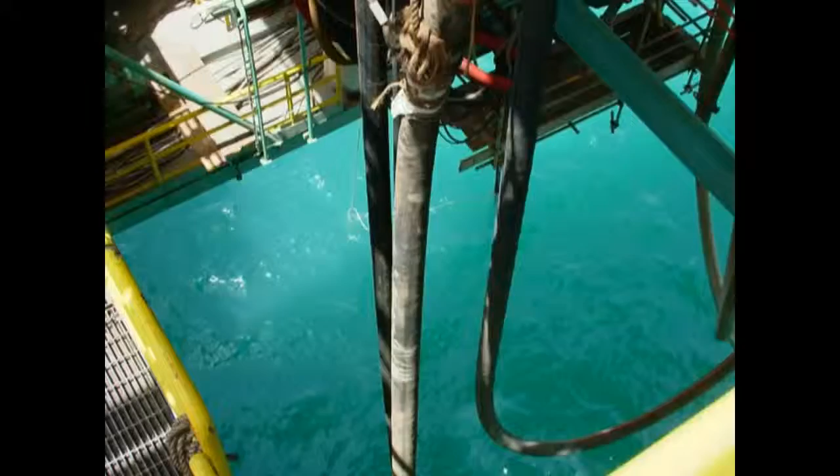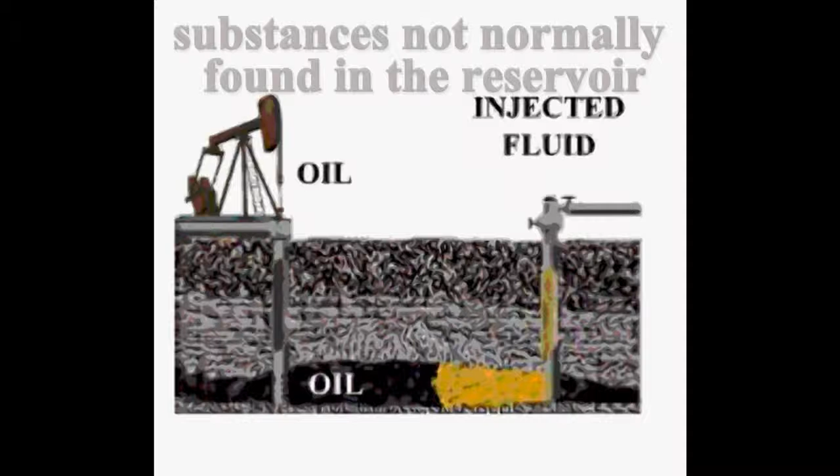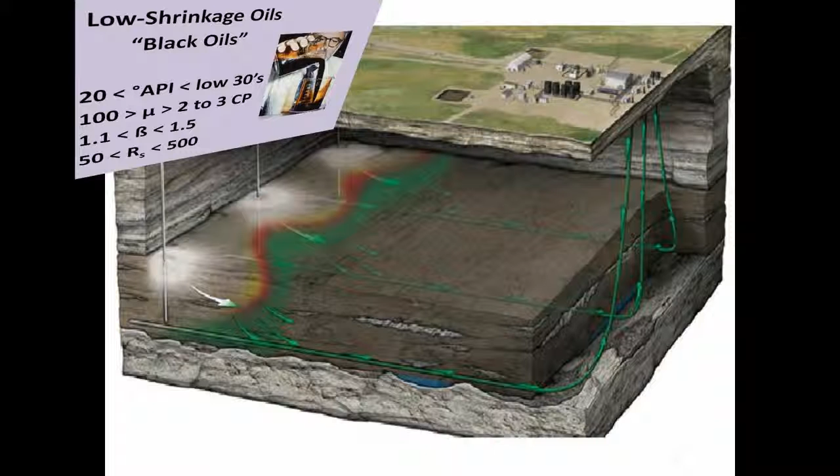Now let's discuss recovery methods using substances not normally found in the reservoir. There are several. The first is thermal recovery. It is preferred for heavier oils, especially oil with about 20 degrees API gravity or less. These heavier oils also usually require a secondary recovery mechanism earlier in the production cycle than lighter oils.

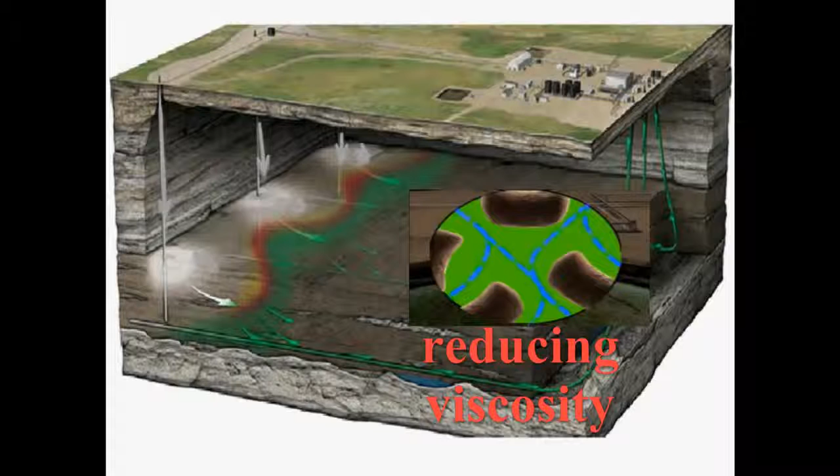In thermal recovery, heat is injected into the formation, reducing the viscosity of the oil, allowing it to flow more readily into the producing well. As in water flooding, injector wells must be drilled, increasing costs. Instead of water, though, heat is injected into the well. In certain conditions, however, that heat can be created in the reservoir itself. There are three techniques used in thermal recovery. Some more successful than others, but each offers specific benefits.

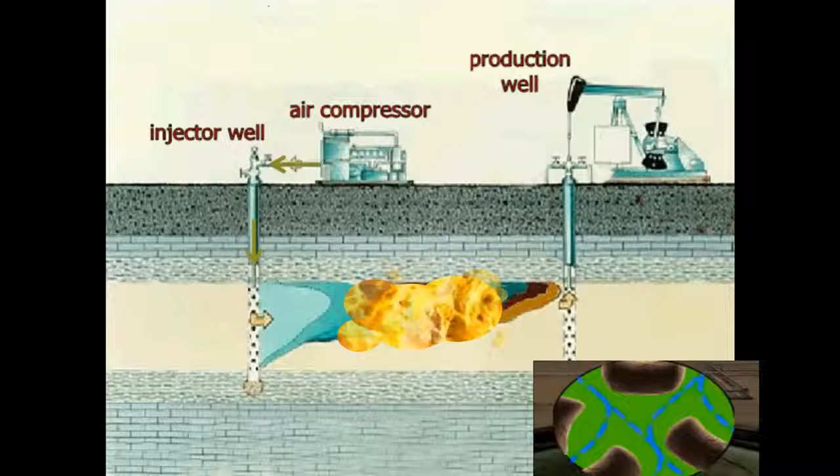In the first technique, called fire flooding, a compressor at the surface injects air down into the injector well, providing oxygen to ignite the oil in the formation. The fire is controlled by how much oxygen is injected. The heavy crude oil is heated by the combustion of these hot gases, thus reducing its viscosity. This method is only partially successful because the colder, heavy oil located away from the burning heat source persistently resists flow and can even block the flow of the heated oil into the well.

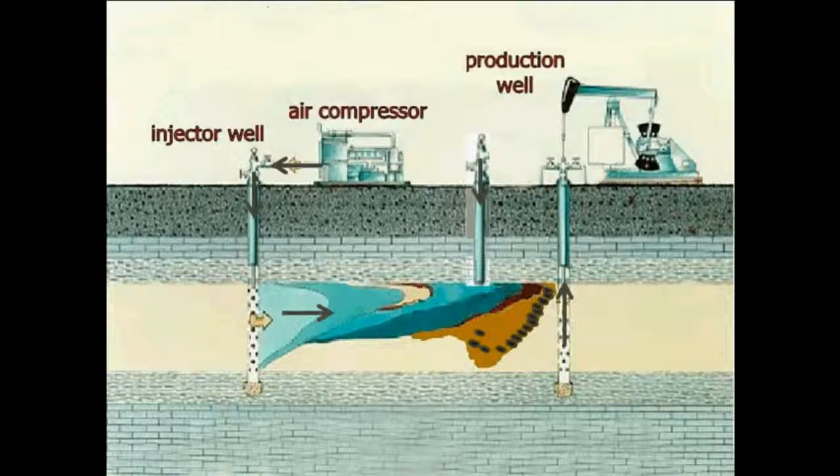Additional injector wells can be drilled closer together to reach these cold spots, but this can prove to be a poor economic solution because this method consumes the oil itself and reduces it to useless char. Fire flooding is considered a final recovery method. A more efficient mechanism in thermal recovery is called steam flooding. In this technique, steam is generated at the surface and injected down into the formation.

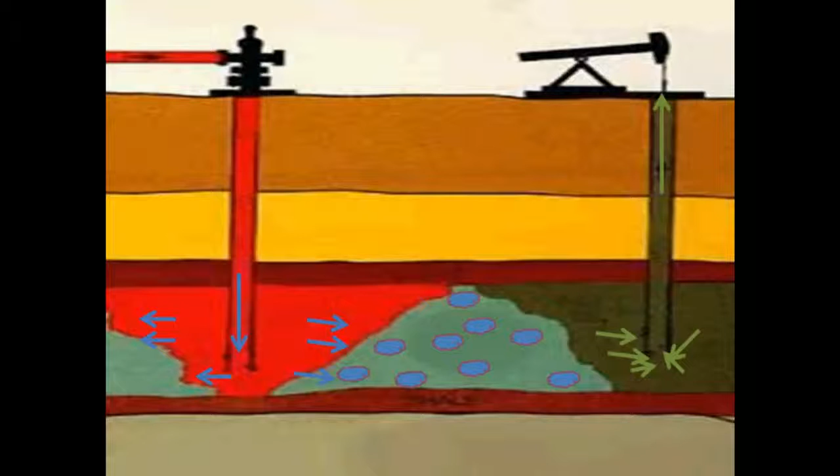As the heavy oil is heated, the steam cools and condenses into hot water that is then allowed to soak into the oil near the injection well. This heat reduces the viscosity of the soaked oil, which can now be pushed toward the producing well. The cooler, heavy oil, away from the heat source, however, is not affected and may impede the flow of oil. Steam flooding can be very successful in shallow reservoirs where numerous injection wells can be drilled economically.

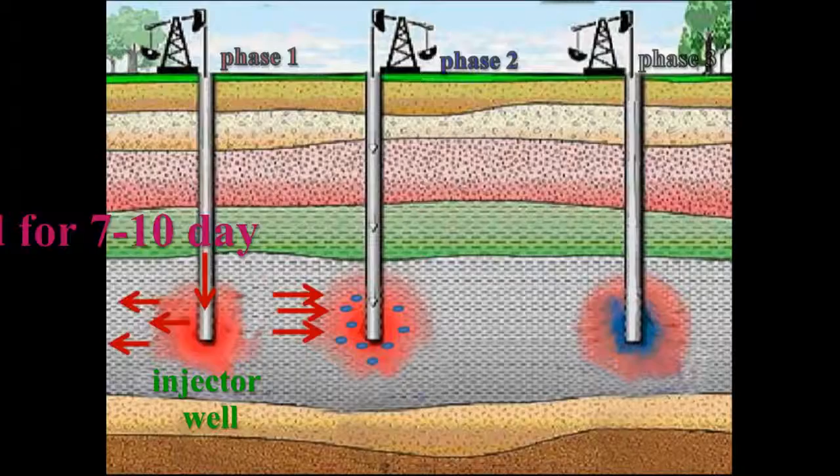The most efficient and therefore the most successful form of thermal recovery is called cyclic steam flooding, or huff and puff. Here, a well will operate as both an injector well and a producing well at different times in a cycle, thus the name. In an injector well, steam is injected into the formation over a period of 7 to 10 days. Steam injection is then stopped for a few days, allowing the steam to cool to hot water and soak the oil around the injection site.

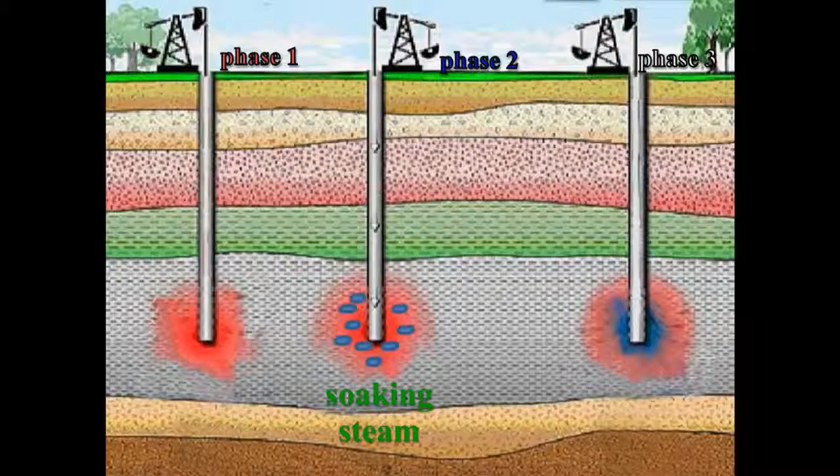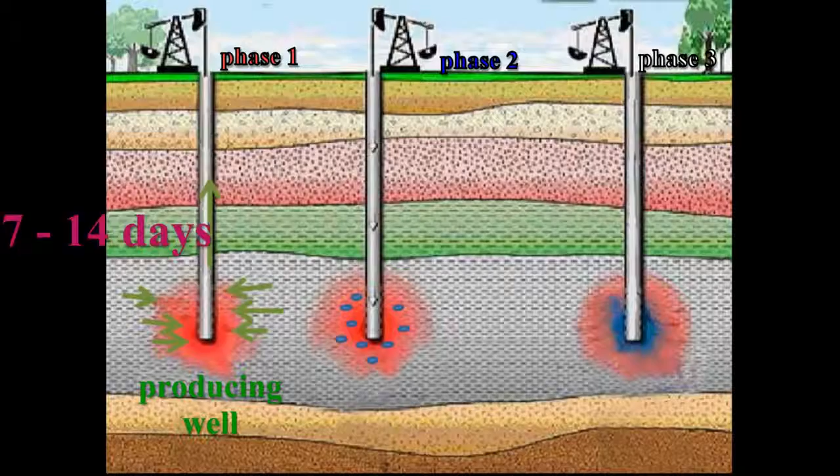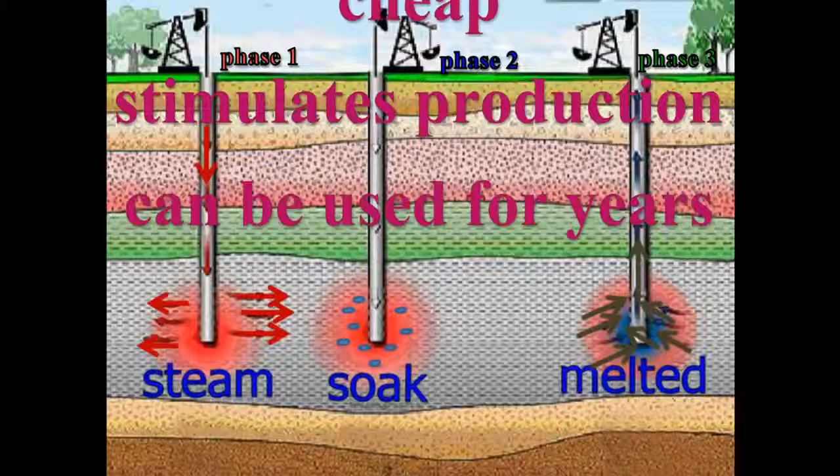When deemed ready, the injector well now becomes a producing well for 7 to 14 days, pumping out the less viscous heated oil. After pumping out this heated oil, the producing well becomes an injector well and the cycle begins again. The advantages of using cyclic steam flooding are many. It is considered to be a relatively cheap technique because it does not require drilling a large number of tightly spaced wells, and it sharply stimulates production. Because cyclic steam flooding can be used to produce a well for years, it is an excellent secondary recovery mechanism for heavy oil.

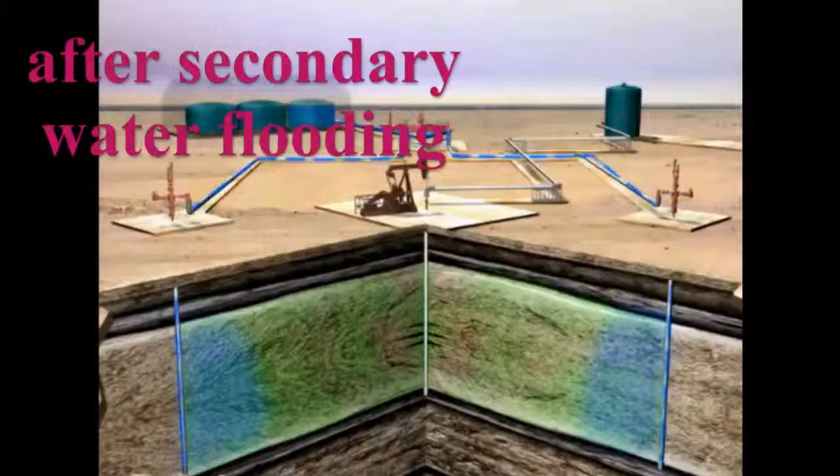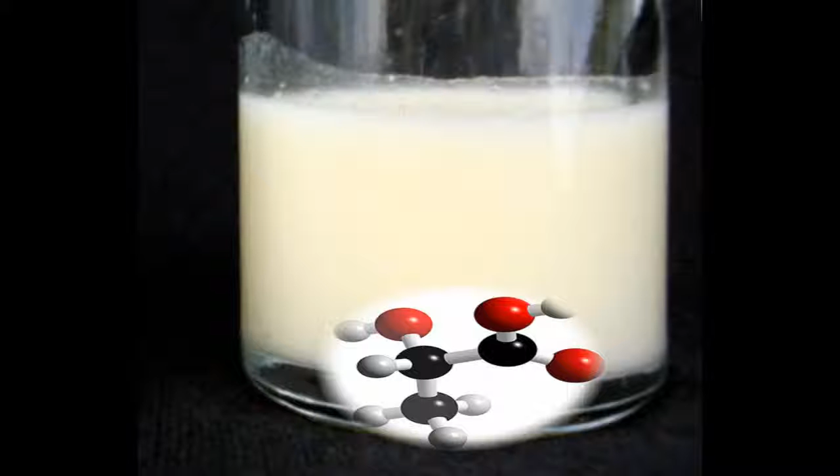Miscible flooding is another secondary recovery mechanism. Usually applied after primary depletion and secondary water flooding have already been used, miscible flooding is more commonly used as a tertiary recovery mechanism. If you remember from your chemistry, a miscible fluid mixes with another liquid to form a single homogeneous substance, like water mixes with milk. This mixture does not change the molecular structure of milk. It just dilutes the milk or makes it watery.

Miscible flooding depends on using a fluid that mixes with oil. This fluid does not change the hydrocarbon molecule structures. It just dilutes the oil, making it less viscous. By the way, fluids that do not mix with oil, like water, are called immiscible fluids. Utilizing the miscible flooding mechanism, a reservoir is flooded with a fluid that is miscible. This fluid causes changes in the reservoir fluid characteristics. For example, it can lower the oil's viscosity.

This, in turn, allows the miscible fluid to penetrate more deeply into remote recesses of the reservoir, lowering the trapped oil's viscosity and thereby allowing the oil to flow more easily. Carbon dioxide, CO2 gas, is an example of a miscible fluid with oil. It is used effectively in miscible carbon dioxide gas flooding.

CO2 can occur naturally in the underground reservoir along with the hydrocarbon gases. When using CO2 in miscible flooding, it is either harvested at the well site or it is transported from another area by pipeline. The CO2 gas is then injected under pressure into the well.

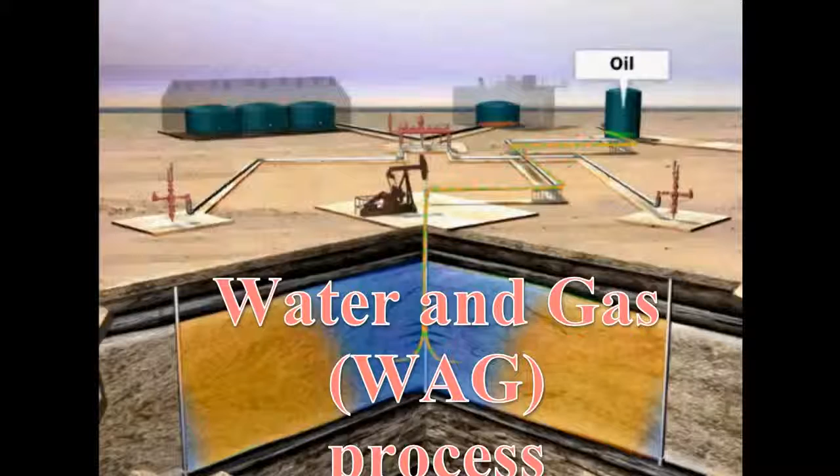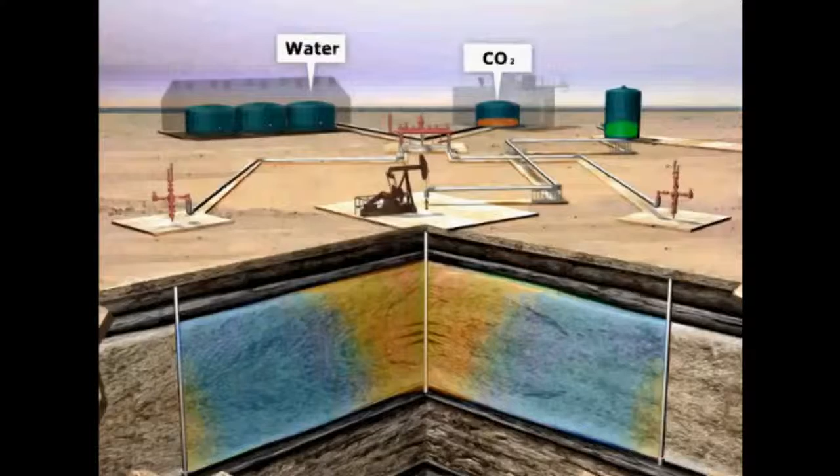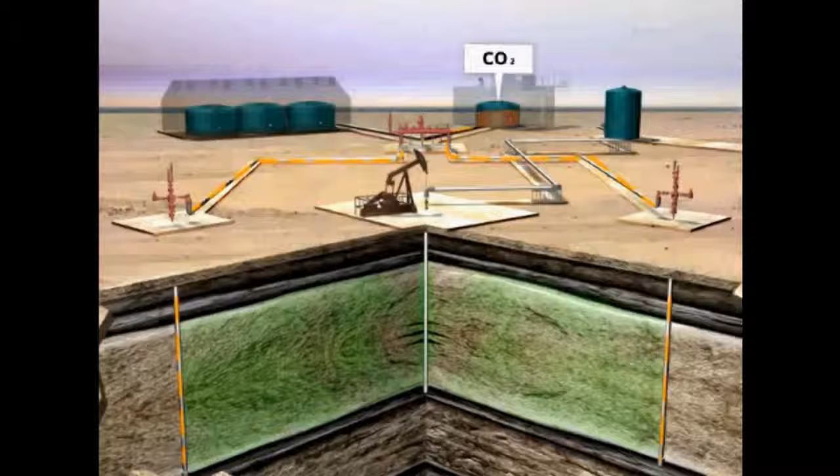Using the WAG process improves the sweep efficiency because more of the reservoir rock is in actual contact with the advancing gas being pushed by the water. The major expense in CO2 gas flooding is the investment in the surface facilities needed to separate CO2 from the hydrocarbons. Fortunately, once the CO2 has been separated from the other gases, it can be compressed and re-injected back again into the well, allowing for a continual process.

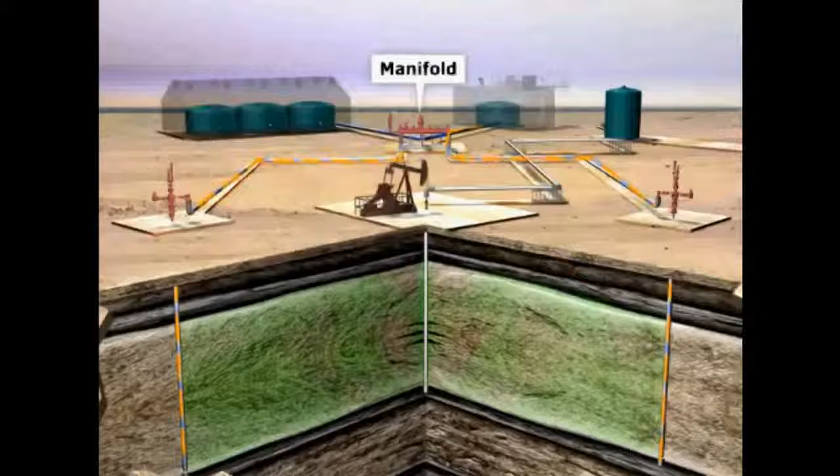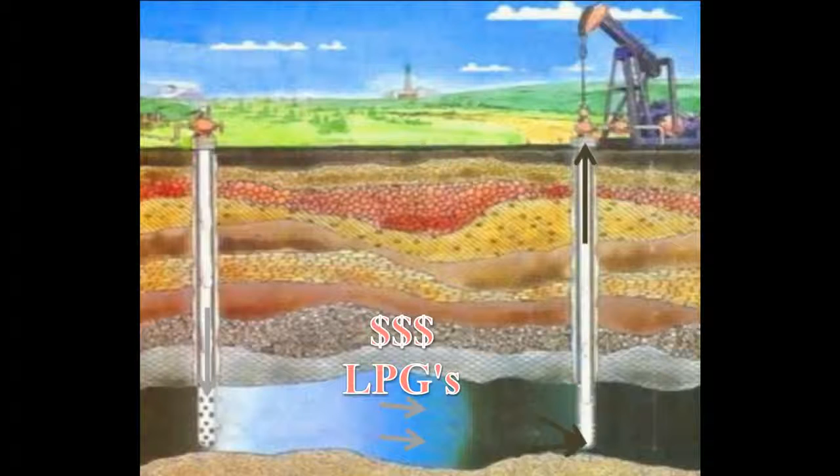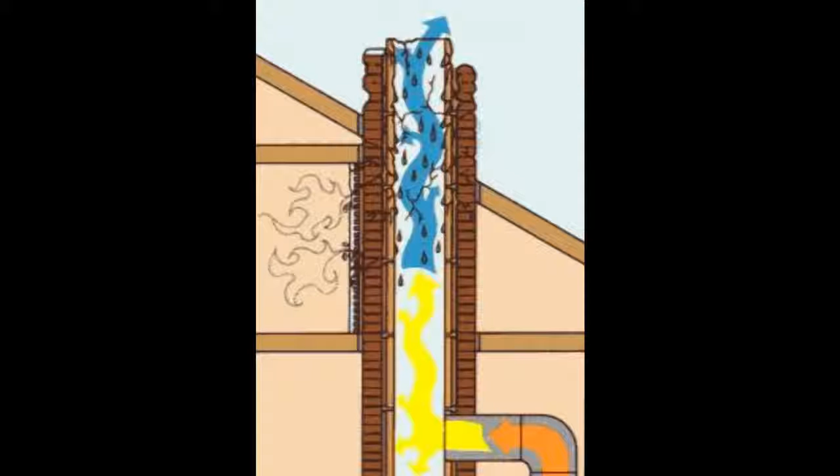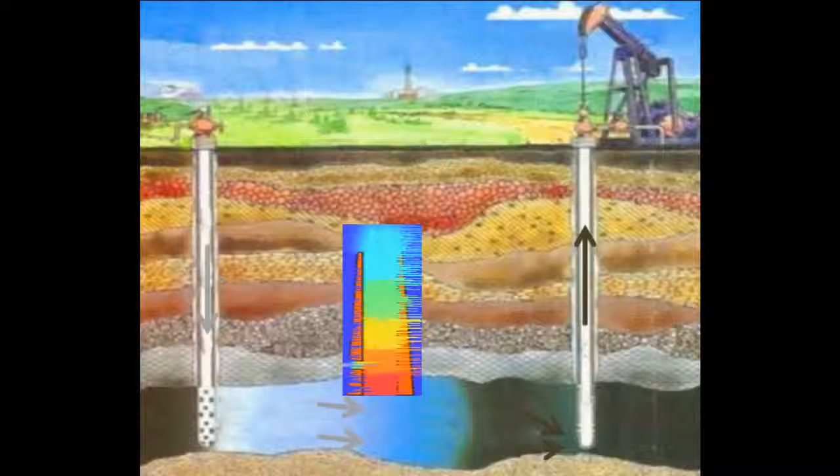In addition to CO2 gas, there are other effective miscible fluids. Among these are liquefied petroleum gases, or LPGs. Although resulting in high recovery, using LPGs is usually too expensive, especially when the LPG market price is high. Flue gases can also be used. Flue gases are waste gases that are released in industrial processes using oil, gas, or coal. Being able to efficiently use flue gases in miscible flooding is limited because most of these flue gases are not readily available.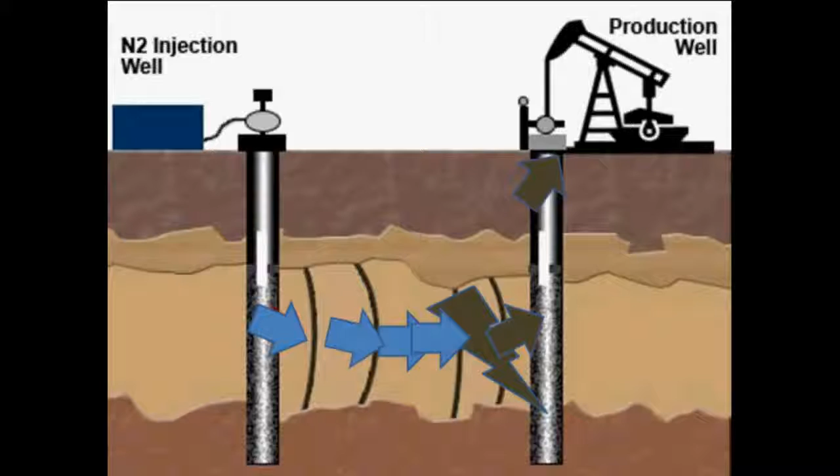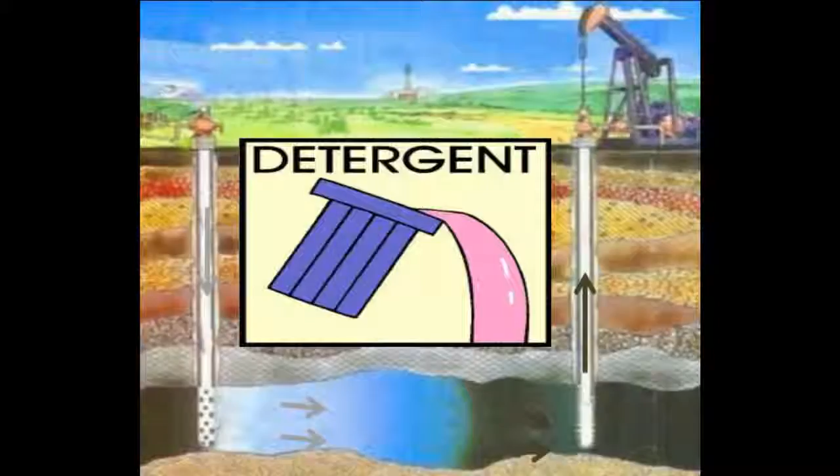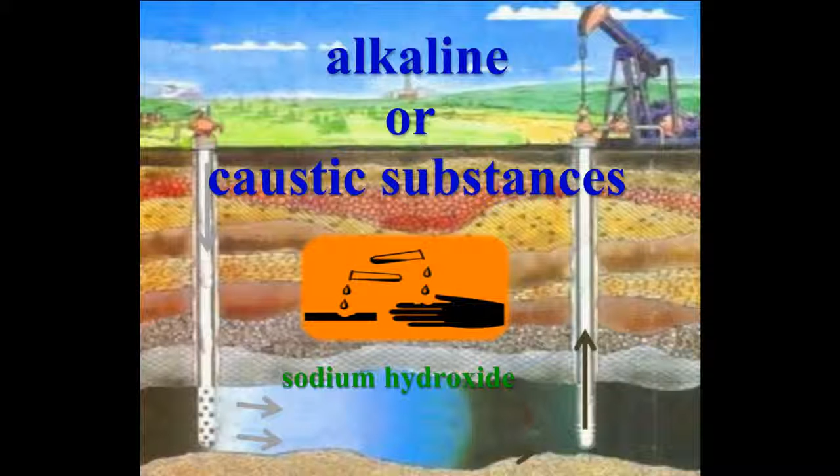Nitrogen extracted from air can also be used in miscible flooding. However, nitrogen is only miscible in deep reservoirs with very high pressures. Detergents are another miscible fluid. When used, detergents are injected into the formation followed by a water sweep. Again, although high recoveries are possible, the cost of detergents can be a deterrent. Alkaline or caustic substances can also be injected into the well for high recoveries, but they are usually unpleasant and unsafe to handle. Like detergents, these caustic substances are also very expensive.

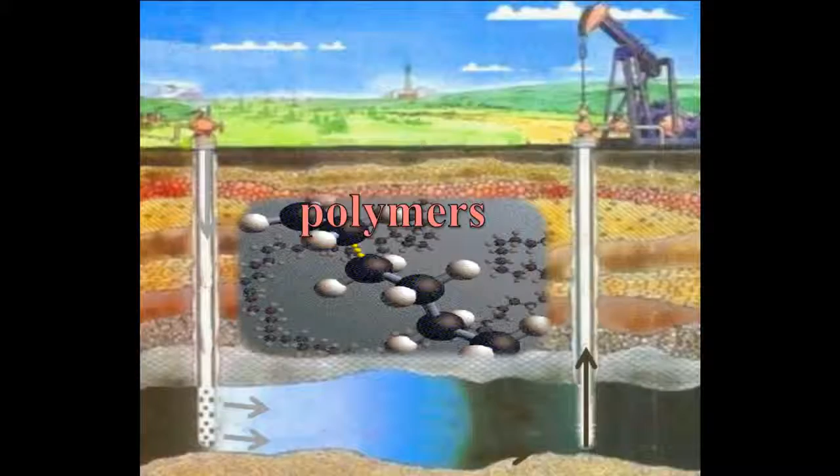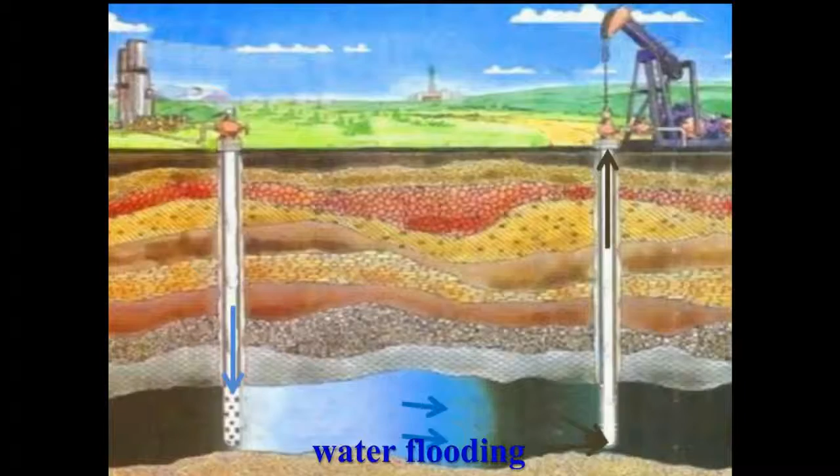Mobility ratio is a fourth type of secondary recovery mechanism. Here, polymers, long-chain chemical substances, are injected into the well and help reduce the friction or surface tension between the water and oil molecules and the rock surface. Polymers have shown promise when coupled with water flooding. Water injections into the well are alternated with injections of water mixed with polymers. The high cost of polymers limits the economic feasibility of using this method.

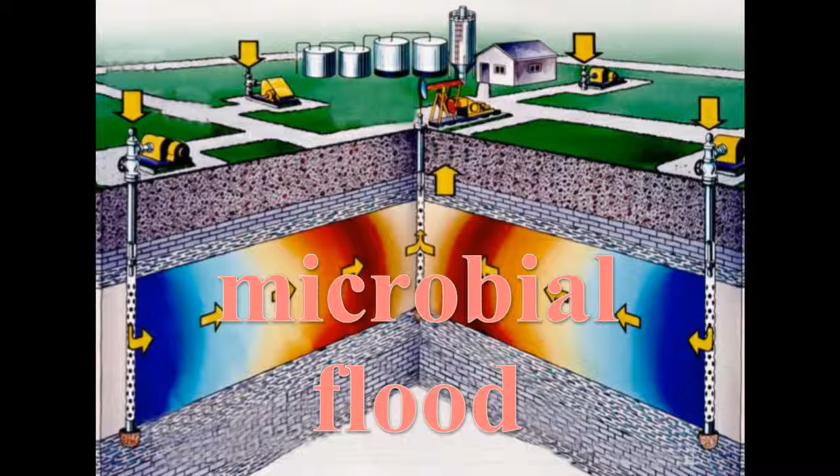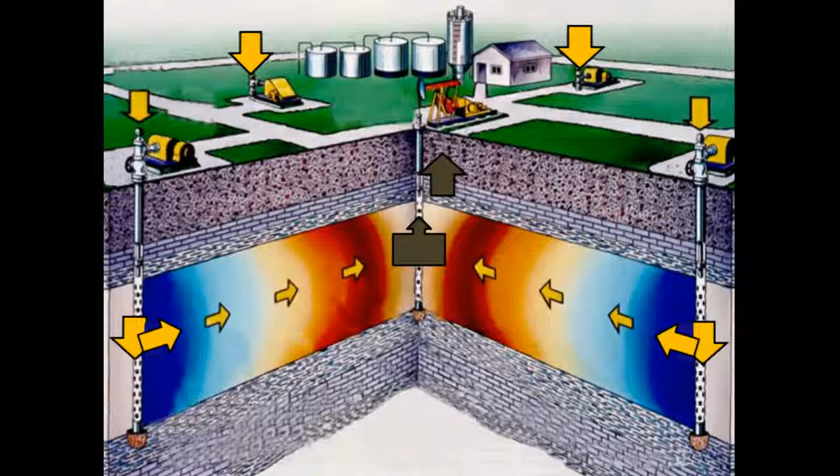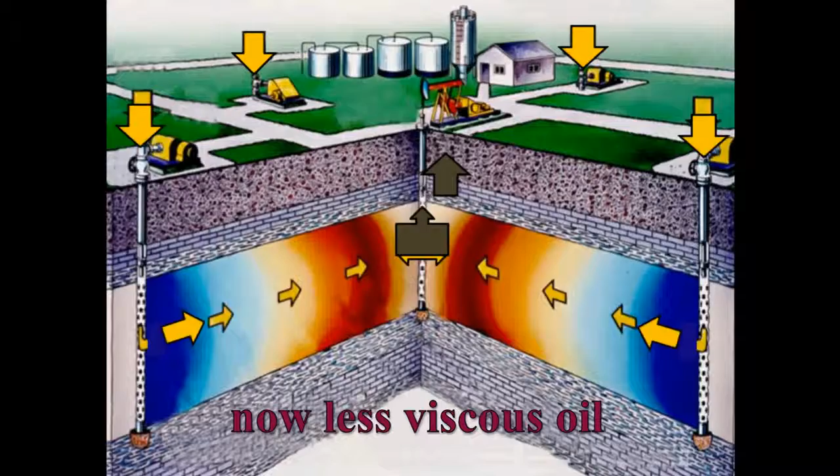The fifth and last secondary recovery mechanism that will be mentioned here is the microbial flood. This process can be very useful under certain conditions. When using this mechanism, crude oil-eating bacteria are injected into the well. As these bacteria consume the oil, they produce a byproduct called methane gas, which is very miscible. As this methane gas is released from the bacteria, it creates pressure which pushes the less viscous oil out toward the producing wells.

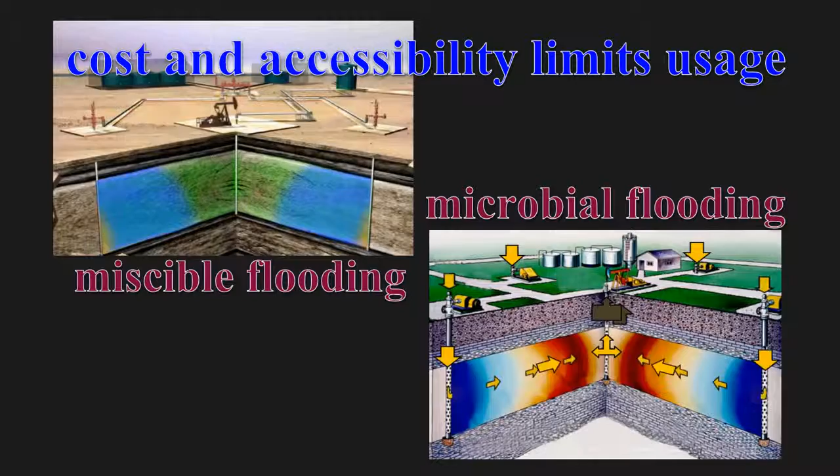As you can see, using miscible and microbial flooding in a secondary or tertiary drilling plan can have high recoveries. Each has advantages and disadvantages. However, because of their cost and accessibility, their use is limited. Currently, a lot of research is focused on finding ways to improve these technologies.

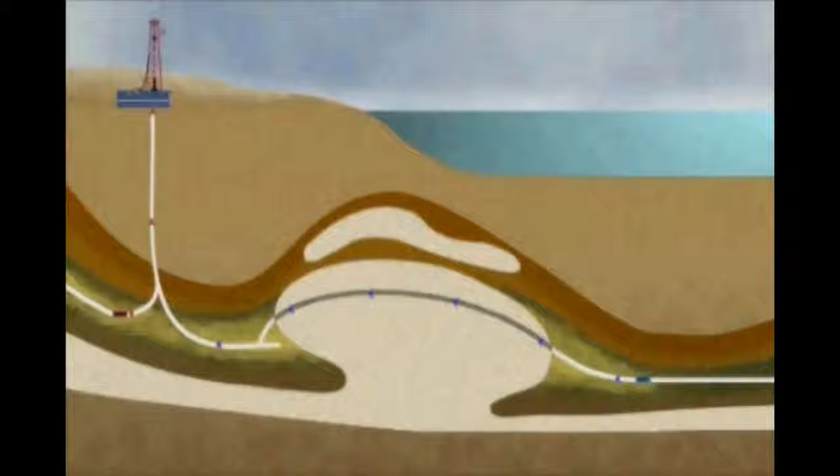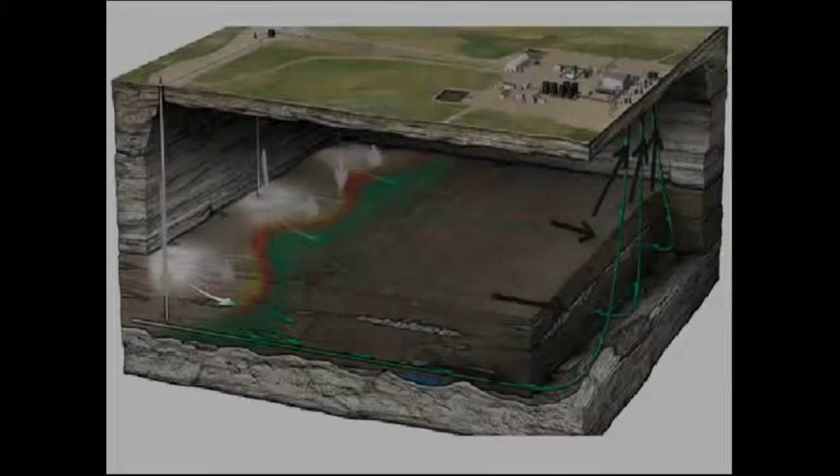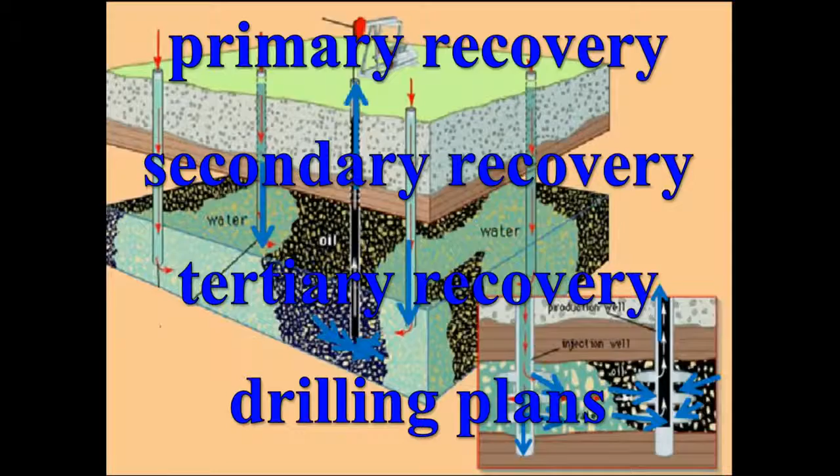So let's review. We have many different drives or types of energy that are used to push hydrocarbons to the surface. These drives can be the Earth's natural sources of energy, like water, gas, gravity, or compaction. They can also be man-made or man-harnessed, like water flooding, thermal flooding, miscible flooding, mobility ratio polymer flooding, or microbial flooding. Whether used in primary, secondary, or tertiary recovery drilling plans, these drives allow us to get high volumes of hydrocarbons to the surface cheaply and efficiently.

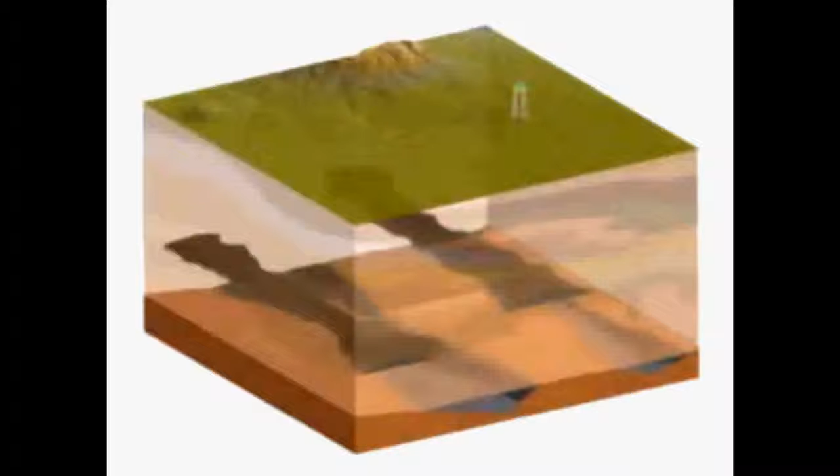Now let's turn our attention to another important task for reservoir engineers. They must calculate as accurately as possible how much recoverable hydrocarbons are in the reservoir. These numbers are extremely important because they determine the future developments of the reservoir based on the value of its assets. But what are these assets or reserves?

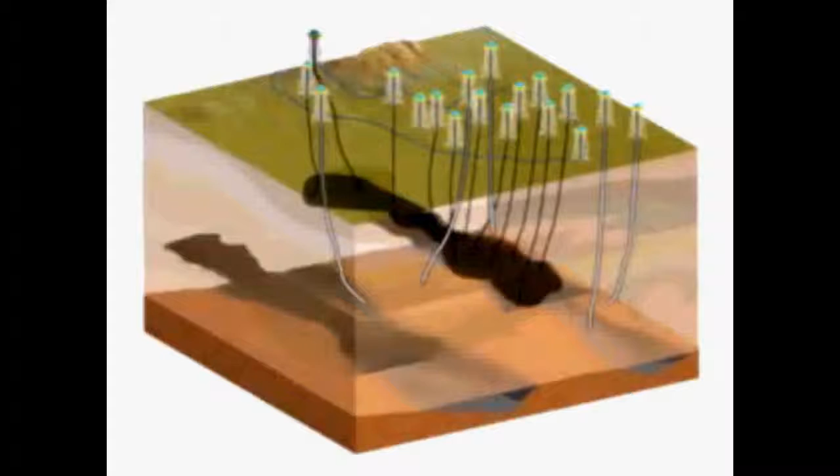Defined by the Society of Petroleum Evaluation Engineers, SPEE, reserves are estimates of the volume of crude oil, condensate, natural gas liquids, and associated substances thought to be commercially recoverable in the known accumulations of oil in the reservoir from a given date forward. In other words, reserves are the current value of all the marketable substances in the reservoir that has not yet been produced.

Oil companies want to be assured of how much production of the different petroleum products they can expect before they continue investing more money. In arriving at an amount accompanied by the value based in dollars, the current value of hydrocarbons is based on the price in the marketplace. In addition, they also calculate the costs of adhering to existing governing regulations and the cost of extraction based on current technology. These reserve estimates are used to determine the potential value or wealth of an oil company.

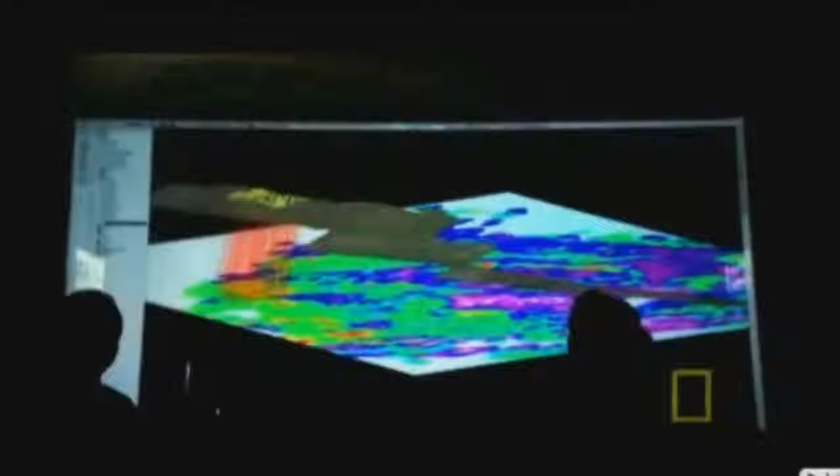Remember that since oil reserves are hydrocarbons still in the reservoir, their recovery rates can only be estimates. In ascertaining how much oil can be recovered, however, assumptions and estimates can be made with the full understanding that they are based on considerable uncertainty. The future market price and advancements in technology, for example, can impact these projections significantly.